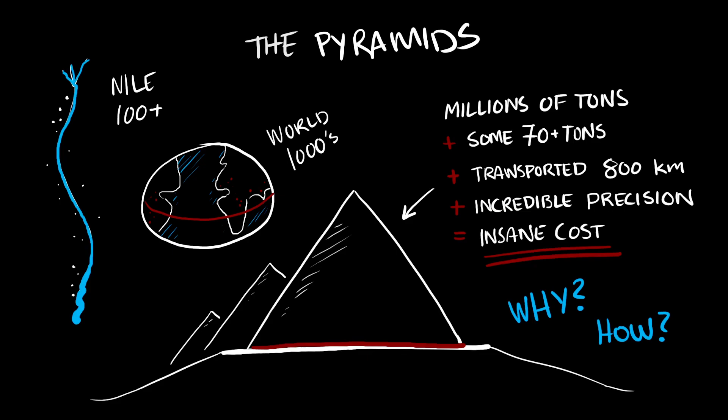Let's first go through some of the existing theories, starting with the official one. The official one goes something like this: all the pyramids were almost exclusively ritualistic, religious, or symbolic in nature. They were tombs or ceremonial sites.

While this has lots of proof going for it, there's also nothing to say they weren't something else and then repurposed in that capacity later. Also, I kind of feel the official story is a little too easy. You can come up with your own theories and make up stories on how it would have some kind of symbolic purpose. Also, a lot of what they claim is kind of unfalsifiable unless you find a better purpose for it.

Then you have the alternative theories, which I think are well-intentioned and potentially more useful. The official story might be convenient, but when you invent a symbolic purpose for things, you might miss out on the practical purpose, which can further inform us about technology in the olden days. But a lot of the alternative theories present too much certainty in my mind. None of them are completely convincing, and a lot are way too certain about their own conclusions, which makes me uncomfortable. But they also often contain useful information, like novel deductions and observations that nobody else has. They tell a story where elements of it might be true.

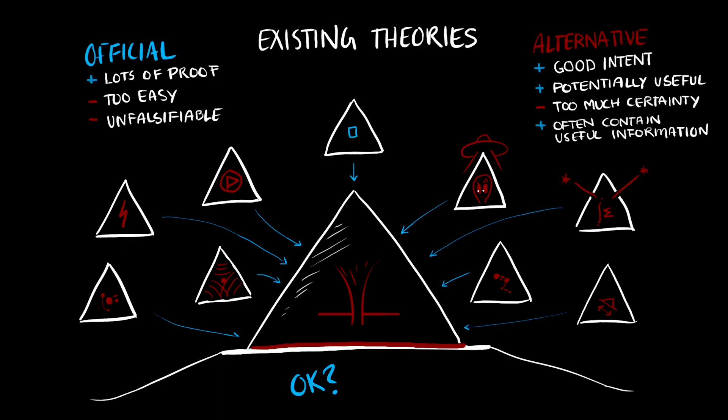And even my own hypothesis, which I'm going to present to you now, also might not be the truth. I'm definitely not claiming that it is. It's a fun hypothesis based on 4 weeks of watching a lot of entertaining videos and reading some papers. But mine too might contain some elements that have some truth to them. Who knows? Regardless, it's a lot of fun. So, all right, let's get on with it.

I think we should start with motivation. Let's start at the very bottom and build up an argument here. I think in general there are 3 categories of motivation that could justify building the pyramids.

The first one is religion, and of course that's the current paradigm—all evidence is interpreted from this perspective right now. Because it's so popular, and also because it's kind of boring, especially for me as an engineer, I say we just skip this one. I don't want to argue against it, but it's definitely a possibility.

The last one is, of course, infrastructure, which is also the most popular category for alternative theories. What kind of infrastructure? Well, we do have electricity, but then again, to power exactly what? We don't have any evidence of electrical appliances or any use of electricity back then. So not only would you have to convincingly argue that the pyramids were power plants, but also that there was something to use the electricity for, and I don't see it.

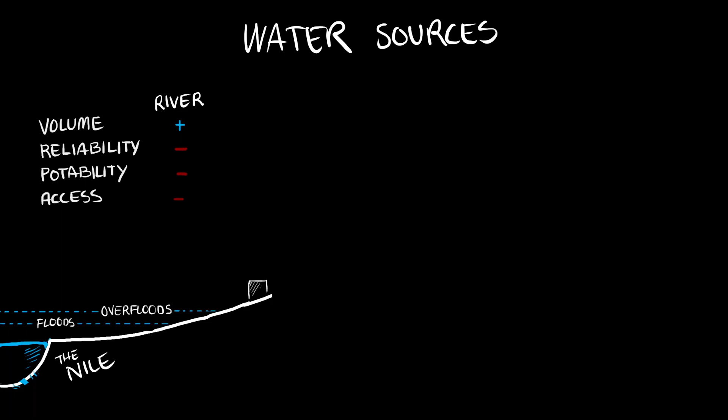The last one is access—was it easy to get to and get a hold of the water? In some ways it was, in other ways it wasn't. I've highlighted some houses here, and you had to haul the water inland from the Nile if you wanted access to it, because the housing needed to be sufficiently uphill or away from both the flood zone and the overflood zone.

They had services back then in ancient Egypt to provide the citizens with water so they could survive. They had people dedicated, whose profession was to haul water inland. But again, it's a lot of work. And if you can get some other system to get the water that you need, and maybe cleaner and better water as well, that would be good.

So the next one I want to talk about are wells. A well is just a vertical shaft like this going into the ground, and it goes deep enough so that it touches the groundwater. Groundwater is naturally potable. It's usually filtered through the rock, through the bedrock, and then you can drink it straight from the well. It doesn't provide as much volume though, because you have to lift up all the water using buckets, but at least you would have access to it, usually where you were.

Now the height that you needed to lift the water could vary, and it also wasn't perfectly reliable. Sometimes even wells would dry up, especially if they were overused. But there are certain things you can do to mitigate this, which we'll look into after this slide.

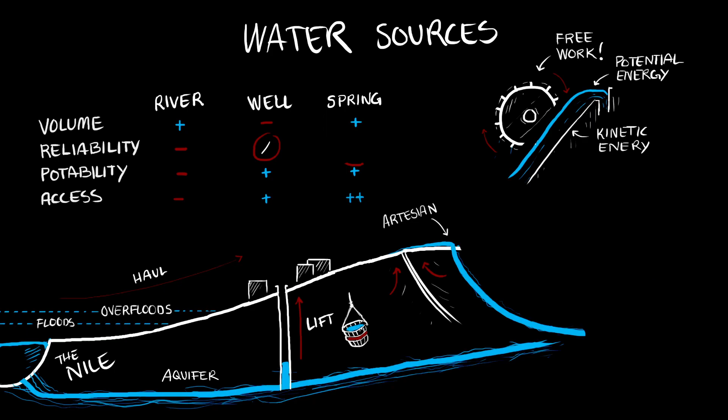In fact, if we think about water coming out further up and then running downhill like this, we convert potential energy into kinetic energy. And if we put on a water wheel or some other device to extract energy from it, we have a lot of free work. So not only does the water come to you, but you can make it do work for you.

In fact, if the aquifer is fed by a lake much higher up, sort of like this, it's so useful that I would actually say it's worth digging tunnels like this and creating artificial springs. That's how useful they would have been. But even springs have problems, which we'll also look into further along in this video. But overall, springs, I think, are just the best thing ever.

Next, let's see how we can improve these. Well design: the basic design of a well is a vertical shaft that looks like this. You need to haul the water up, and the water level inside the well can oscillate up and down, and sometimes it's so low that they dry up, and you can overuse the well. So it's a lot of work and it can dry up. It has its limitations.

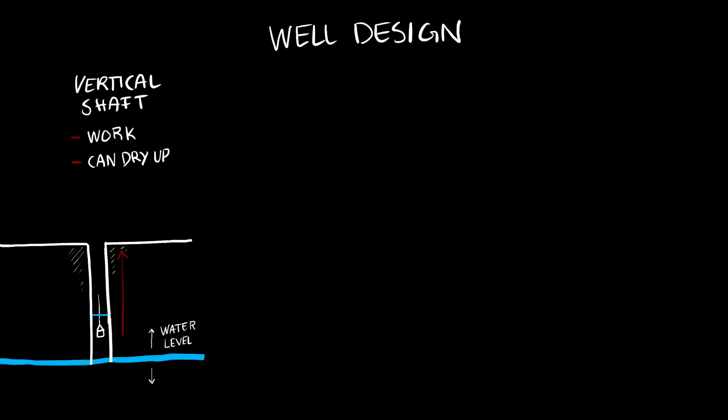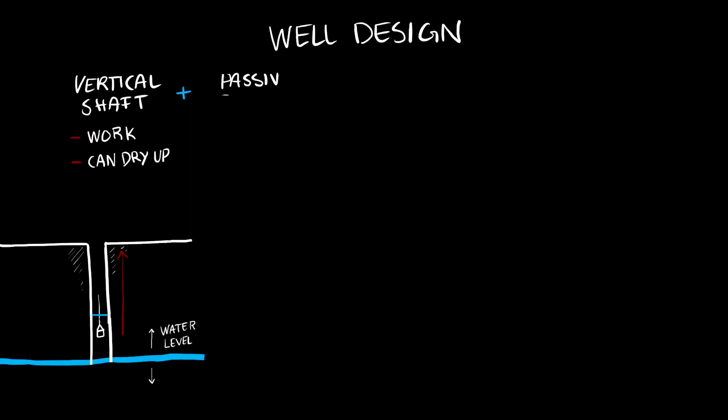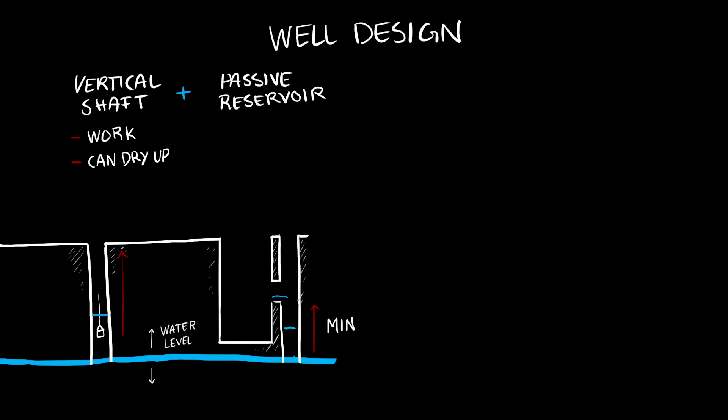So let's look at what we can do to improve the design of a well. I think the first instinctual thing is to include some sort of passive reservoir to it. So let me draw this out for you. You have a normal well here, and then you also dig an additional basin next to it. When the water level in the ground rises above a certain minimum limit, the water spills over the edge and then fills up this basin.

This, on average, means that you have more stability. You have an additional reservoir of water you can extract from, even if the well dries up temporarily. And on average, it's going to be less work for you, because while the well level goes down, you're still going to have a higher level in your reservoir. So on average, it's going to be less work for you.

But you do have this minimum that you need to reach before you start filling it up. And also, you have the opposite problem: there's a maximum here too. If you fill it beyond the minimum, when the water pressure and the groundwater level goes down again, it's going to flow out, and then you're only going to be able to maintain that minimum amount. So you have both a minimum and a maximum.

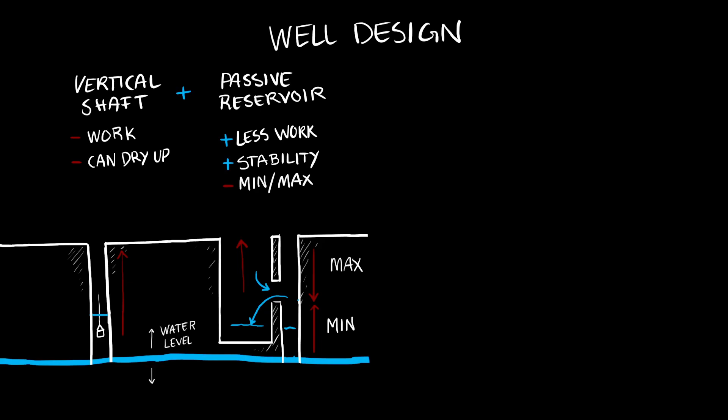So then the natural next step is, well, can we fix this? Do we have a better design? Yes. And the only thing we need to do is include a check valve. Let me draw this out for you. A check valve is essentially a one-way valve. Water can only flow in one direction, and in this case it can flow into the reservoir, but not out of it. The way I've designed it here, which is the most likely design I think the ancient Egyptians would have used, is just a rock that would be lifted up by the water pressure, and then lay down again inside a groove and close itself up when water wanted to flow out of the reservoir again.

Now this means that it's even less work. The average water level is going to be higher on average. You don't have any min and max anymore, and that contributes. Also, it refills constantly, so that's a benefit as well.

Now, can we further enhance this design somewhat? Yes, I think it makes sense, and we know historically that they did so, that you add a diagonal passage, like so. This allows you to construct the reservoir easier by having rocks pushed up or pulled up the diagonal passage instead of hauling them up vertically, which can be risky. It also allows easier construction and easier extraction of the water itself. You can have carts, or you can just walk down to the water surface and use buckets there instead of having to use a rope to haul it up. So in general, I think this is just a more practical solution. It might not look exactly like the way that I have drawn it, but something like this.

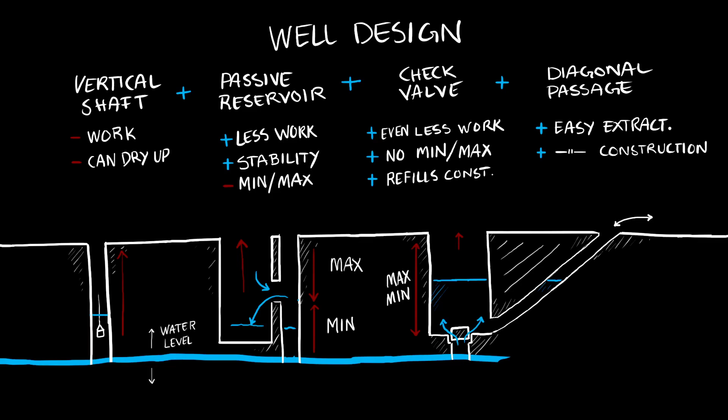All of these things that I've designed so far, we do see all over the world, and they have some common negatives. The first is that they risk contamination. They're open to the elements, which means dirt is going to get in, and not only is the check valve going to get clogged up, but you get dirty water, and you don't want that. You also risk overflooding. What if the water pressure inside the well exceeds the ground level and water starts spilling out of the well uncontrollably? Sort of like this. Since infrastructure and a lot of housing is made out of mud brick, you can easily see how this could create massive problems. You could have destruction, and yeah, it would be deeply unwanted to allow this to happen.

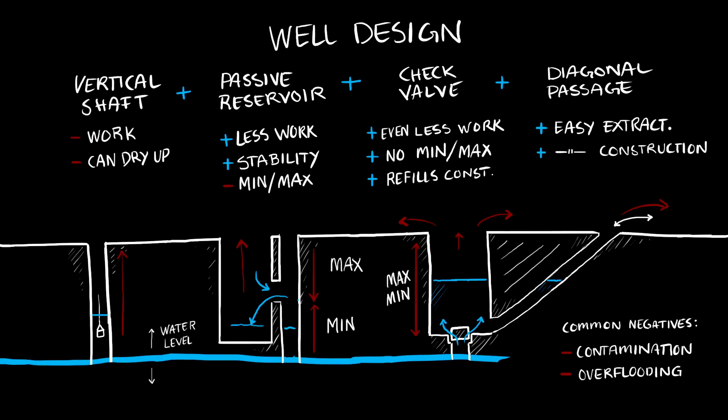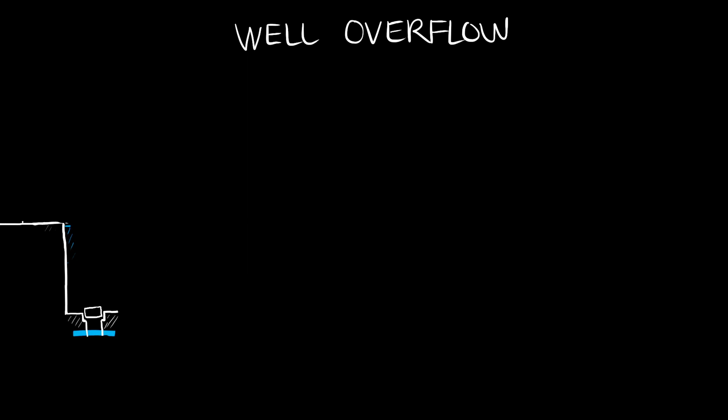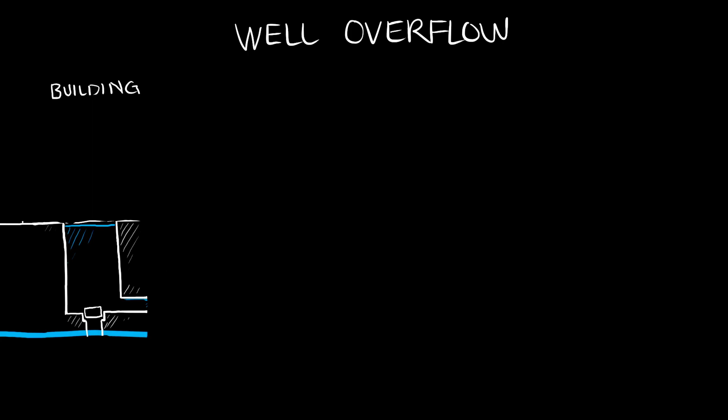So how can we prevent that? Let's look at well overflow. First thing I would do to my well, let me redraw it here for you, sort of like this. It's now filled all the way up and it wants to go even further. I would put a building on top of it, with some heft to it, some weight. Now the water needs to push the building away in order to escape, and of course that's going to be difficult. This would cover it so it wouldn't get contaminated, and it would plug it.

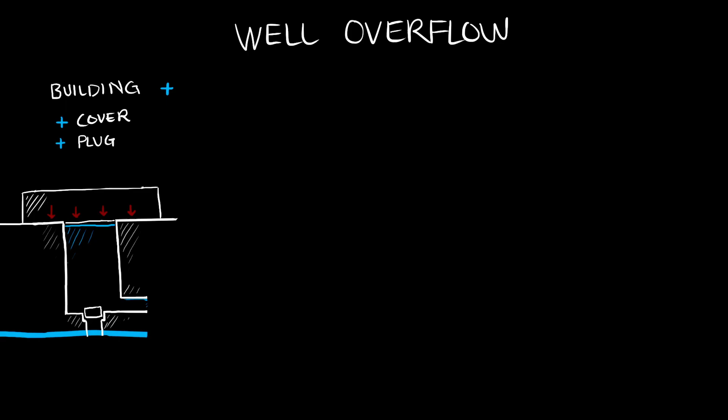But what about the vertical passage? We could make an even bigger building to cover both the vertical passage and the reservoir, but I think it makes sense to make a portcullis like this. Instead of having to expand the building massively, we can simply have a sliding door that we could close, and now we don't allow water to escape. That is kind of safer, at least. It's not completely safe, but at least safer. And we do get some control over the water source. We can open up the portcullis a little bit, although how feasible that would be when the water pressure is quite high, I don't know. I think it would be very difficult. So in general, with this solution that I've just drawn here, you kind of lose access to the well. So how can we maintain access to the water?

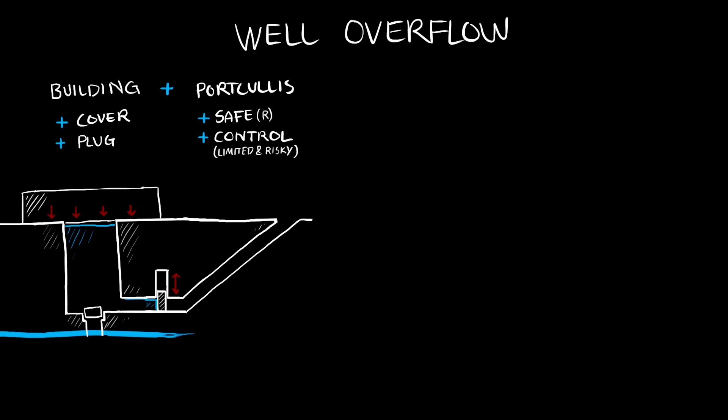And so the next thing that I think makes sense to try is to have some sort of chimney. Let me draw this. It would kind of look like this. Now you have a relatively small chimney that you need to force up into a certain height above ground, which means that the exit pressure of the water coming out of the chimney is going to be lower than if you took the same amount of water in the same cross-section further lower towards the ground.

This would allow you to retain the water supply, although in a limited capacity. You can't extract as much water as you previously could, but at least it won't spill completely uncontrollably. You could also look into integrating some sort of flow limiter inside the chimney, maybe something looking like this, having a reasonable amount of flow at any given time.

All right, next step would be a stepped construction, I think. I'm starting to get into more and more speculative territory as this video goes along, so I hope people are aware of this. So yeah, let's just proceed. This, I think, will be a more flexible solution, although a risky one. Let me draw this one out for you. It will kind of look like this.

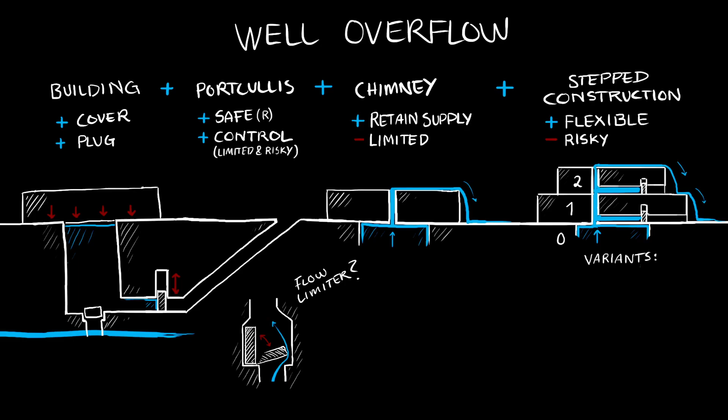You can have multiple levels and multiple portcullises, allowing you to open up the one that's most appropriate to the pressure and the flow rate that you want out of your well or spring. In general, I think there would be two variants. The one that I've sketched for you here, where you have 3 levels, I would call the single column type using portcullises.

Conceptually speaking, this is how it looks. You have many portcullises at many levels, and then you make the water travel further up before it spills over. And this spillover effect means that you get less flow rate. So the higher up the water column is, the higher up you want to open up the portcullis to get the same amount of flow rate, because you probably have a predictable amount of usage of the water, and you want a predictable amount of water as well.

The other one uses multiple columns instead, kind of like this. But here, I don't think it makes sense to use portcullises. Instead, I think you need to use some other sort of valve or mechanism, and I call these overflow valves. Let me sketch these out for you. I would design them something like this, the most basic design ever. It's simply a large block of stone in a small chamber, kind of like the antechambers that you see.

Now, how does this work? Well, it works by the stone at a certain flow rate will probably move and block the exit, the outlet of the overflow valve, at a certain flow rate. And then if we put these overflow valves at many levels up, you can see that first it would want to have water flowing through the -1 overflow valve. And then when the water flow becomes too much because of the increased amount of pressure, it blocks itself off, and now water has to flow through the 0 column. And then that blocks itself off, and then it goes to number 1, and then number 2.

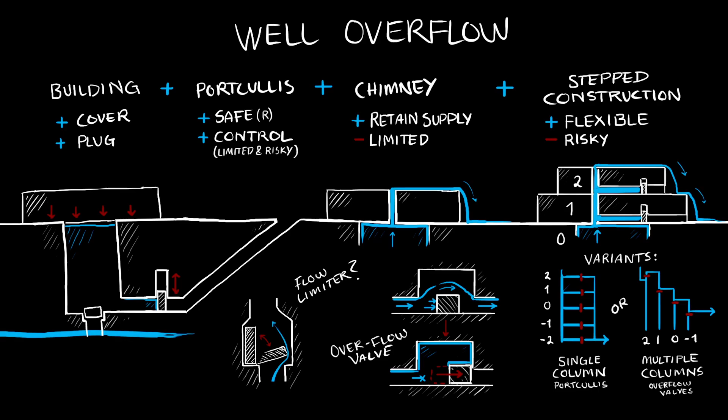All right, so the next step then is to talk about, what if we have an overflowing spring? What do we actually do when water is just gushing out of the ground completely uncontrollably? Now we can't just start building a very neat and orderly structure straight on top of the spring, the rocks and the stones will simply not stay in place. They will be pushed away by the huge amounts of water that's spilling out. And of course, this overflowing spring that might suddenly appear will also cause potentially a lot of destruction.

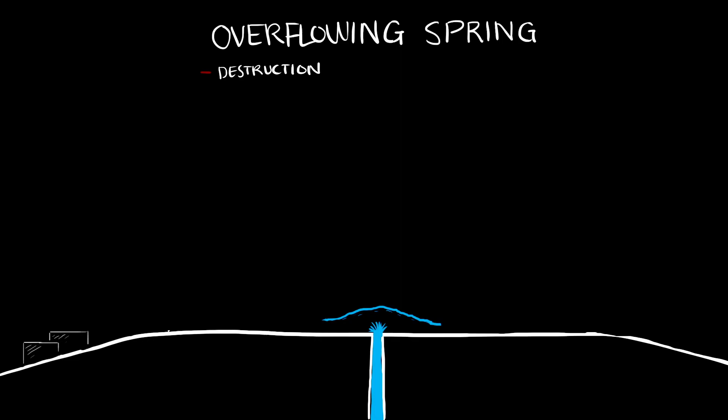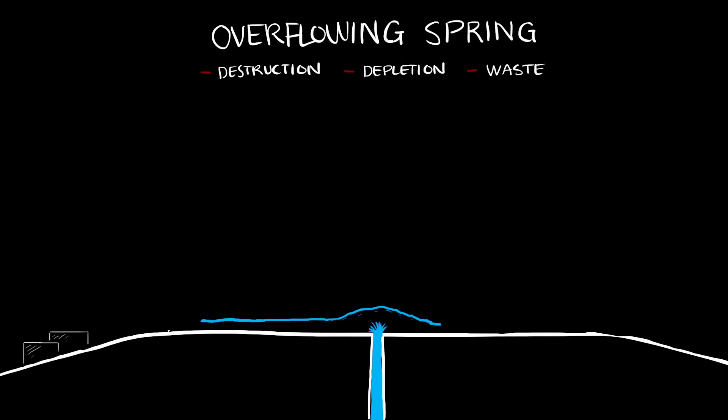If you have a lot of houses close by, something like this, this is kind of like on top of a hill. Then water can flow over there and destroy the houses and also destroy a lot of infrastructure. It can also deplete the water source, like the lake that I drew earlier. And essentially what you're doing is wasting a lot of very valuable, potable, useful water. So how do we fix this? How do we actually handle this situation?

The first damage mitigation thing that we do is build some retaining walls like this. They need to be quite a distance away from where the water is coming up, because you want the water to settle down and be even towards the walls so it doesn't spill over.

Also you want enough room to build a large structure over the spring somehow. The next step is to construct a large channel to guide the water safely away, and it would look something like this, with the water flowing down like that.

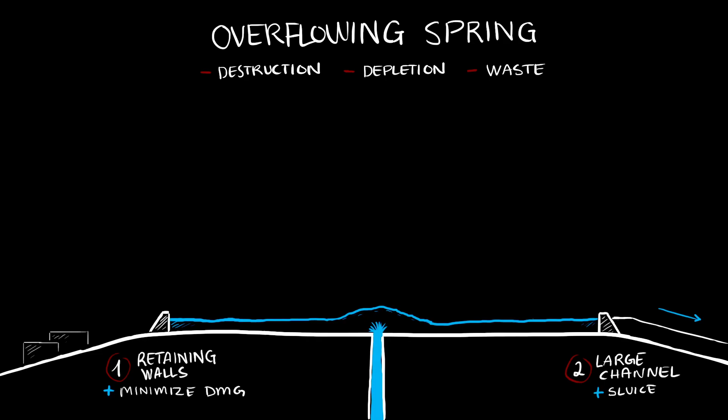What I would also look into doing is integrating some sort of sluice system, as well as a large channel, to exploit the potential energy in the water and haul building materials up to the site using free work.

So now these buildings are safe, and we can start actually closing off, or at least limiting or controlling, the spring itself. I would also level the ground. So how do we stop the flow? How do we actually close off the spring itself? This is where the title of the video comes in.

I think it makes sense to build a big pile of rocks. We start stacking rocks on top, around the spring first, and then one of the last steps is that we toss rocks in the middle. Eventually all the weight of the big pile of rocks will put enough pressure on the spring to stop the flow. We do lose access, but at least we're not wasting all this precious water anymore — we're not depleting the source.

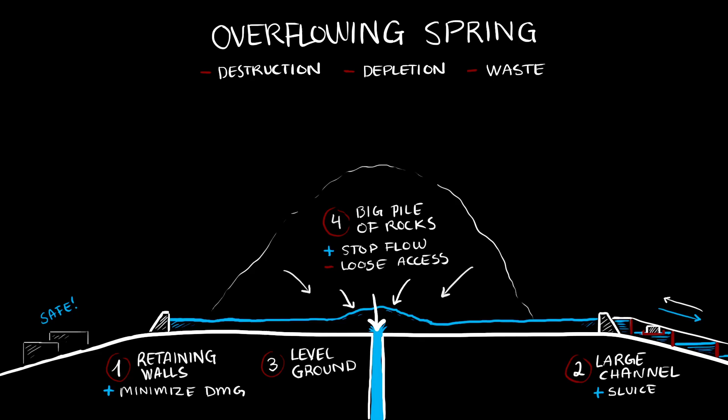But isn't there a better way than to just randomly stack a huge pile of stones? Can't we do it in a more systemic and better way in general? I think we can. But how exactly do we do this?

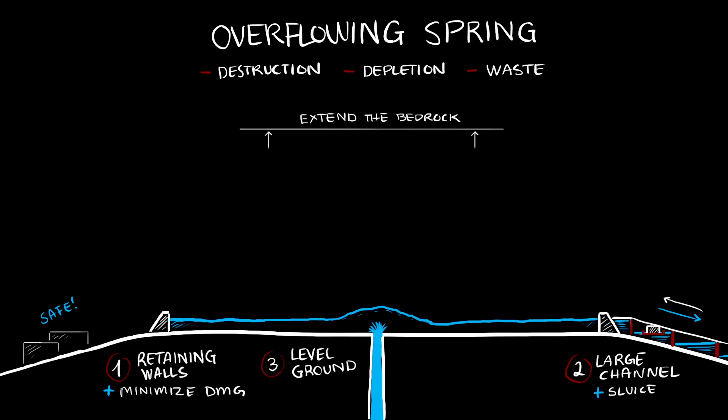I think I would want to use many of the same solutions we already talked about when it comes to wells. If I can somehow extend the bedrock upwards, I can use those solutions. This would necessitate building a column of water like this, and the column of water would need to be a certain height, and also a certain cross-section if we want enough to flow through it.

Let's start with the height. What kind of pressures do we need to counteract? Well, if we want to completely halt the spring from flowing, we need a water column that produces a hydrostatic pressure equal to what the pressure is down at the base, at the very exit of the spring. Not an unrealistic pressure to face is something along the lines of 10 bars.

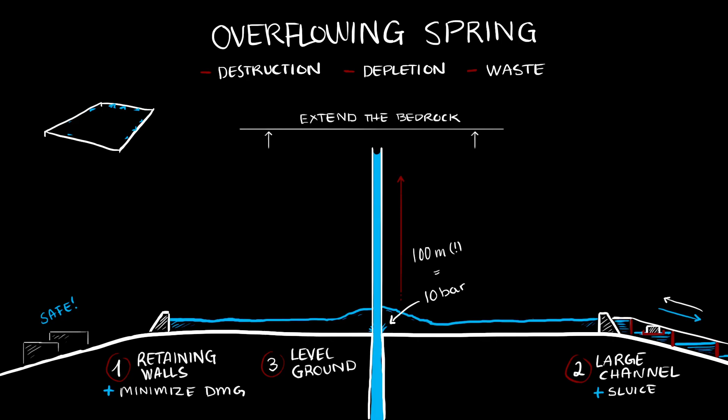For those with some familiarity, that means we need a water column that is 100 meters high. Holy shit, right? That's a huge water column. For the Americans out there, that's 330 feet. That's very, very tall.

And of course, because we want a certain size for the water column — this is the cross section — let's say it's 1 by 1 meter. Maybe it doesn't need to be this big, but let's just say that it is. Well, we have a problem here.

The problem is that water exerts pressure. Water, especially at 10 bars down at the base of the water column, is going to exert a huge amount of pressure, and also a huge amount of lateral force outwards. Drawing this on the water column itself, we can see that the pressure, and thus the force the water column exerts laterally, is diminishing like this. It's largest at the base, and then it gradually weakens towards the top.

How do we handle these forces? This is a huge problem. We don't have steel pipes. Instead, more or less the only solution that we have available to us is something like this.

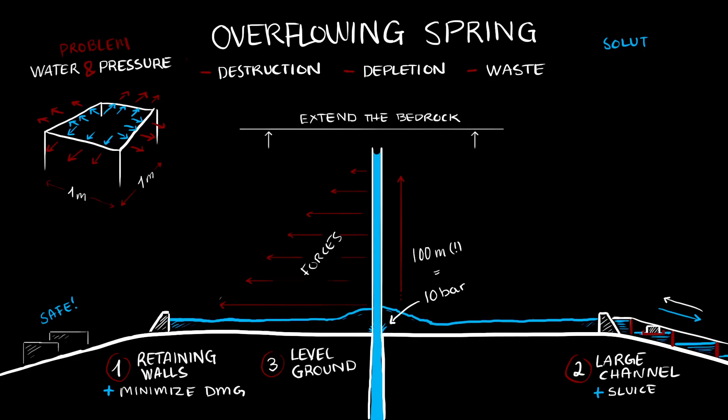We need to use weight and friction. If we have a stone like this, it has a certain amount of weight to it. That weight bears down on the ground, which when the water pressure pushes on it, attempting to move it using a force, friction withstands moving of that block. Of course, we need to have a lot of blocks, both stacked next to themselves and also on top of them, kind of like this, in order to counteract those immense forces that we're talking about. And the amount of rock and the amount of friction and thus the amount of weight is going to be roughly proportional to these arrows.

And so if we draw this out, and you might have suspected what I'm on about, you get a pyramid. And that's kind of neat, I think. The optimal design to counteract those forces is actually a pyramid shape. Or, well, in actuality, it's a cone shape. But taking into account the fact that it's much easier to construct something that's square instead of circular, then a pyramid is the one that makes the most sense.

So now we have a water column. That means that we can build it gradually upwards, and it's safe, and we always retain access to the water source as we build it up. And we've built a big pile of stones, big pile of rocks in a pyramid shape. And the pyramid shape is stable. It's going to be strong against those lateral forces that the water column is going to produce.

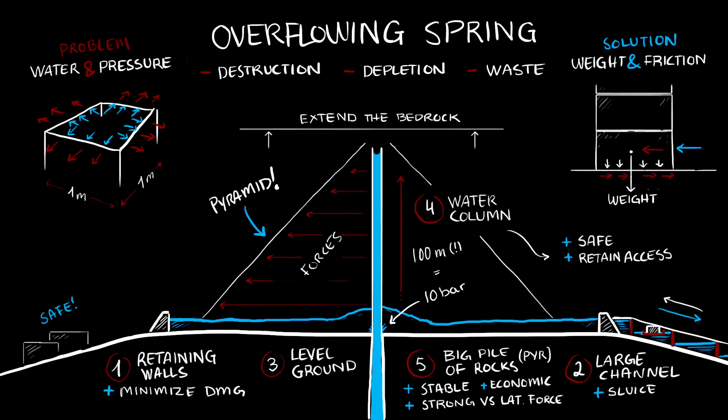Now, I want to mention that I wouldn't necessarily want the walls to be 45 degrees because the bottom layer of the pyramid is also going to have the weight of all the other rocks stacked on top of it to further increase the friction and stuff. So I don't need it to be 45 degrees. It can be a lot steeper than that. And I think the Great Pyramid is something along the lines of 51 degrees from horizontal, but it can be a lot steeper than that. I think looking at the pyramids all over the world, a lot of the pyramids are a lot steeper, and it truly makes sense. It's still going to be strong enough to withstand the forces that we're talking about.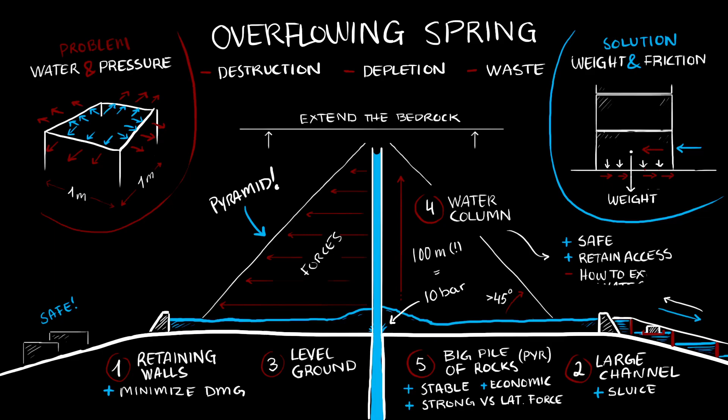But we have the next problem, and that is going to be, how do we extract the water from the water column? So that is going to be the next thing. Safe extraction of water. So let's first look at the height.

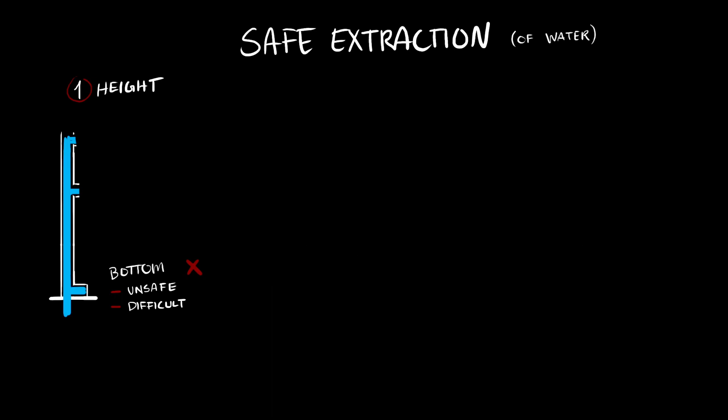What height on the water column do we extract the water at? And if we do so at the bottom, it's going to be completely unsafe at those 10 bars of pressure. And it's also going to be exceedingly difficult to make some sort of valve that can operate at those pressures. So that's completely out the window. Looking at the top, well, we have no flow rate there. That's just out of the question.

The logical compromise, or the best position, just flat out, is of course a bit down from the top. We kind of estimate where we want it, where we can construct it compared to how can we engineer something that's going to function decently. A bit down is going to give us a decent flow rate. And also, if we find the correct position of it, we're going to ensure that even if the pressure drops a little bit, we're still going to have a decent amount of flow rate if we can control it somehow. So that makes the most sense.

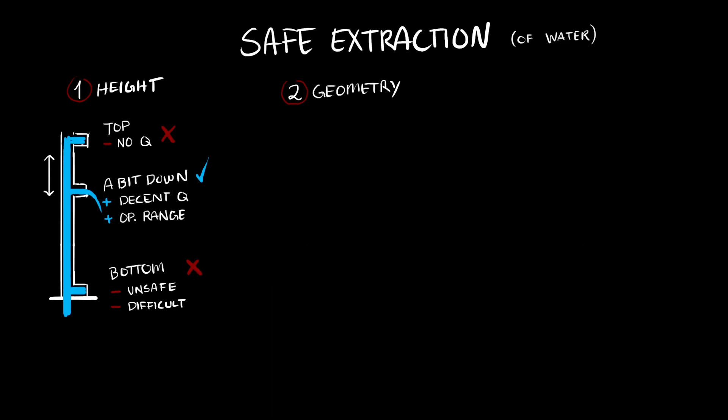The next one is geometry. And just extracting the water straight out from the water column like this at a 90-degree angle using a sharp corner, that's a bad idea for several reasons. The first of which, you're going to get turbulent flow. It's going to cause a lot of restriction and problems with the flow.

So to describe the difference between laminar, which is the good thing, and turbulent, where the water molecules are kind of like chaotically swirling about. You have a lot of movement not in the direction that you want. The other is laminar.

All the water molecules are traveling in the same direction, more or less—not necessarily at the same speeds, but still it's the most efficient way of transporting water. There's less restriction, it's more predictable. So turbulent is bad, laminar is good. How do we fix this in our water column?

There are multiple solutions, but I think maybe the simplest and best is to construct a reservoir like this. That allows the water to exit through an inlet, slow down inside the reservoir, and then accelerate gradually out the outlet again, facilitating more laminar flow. You also have more control because the water level inside isn't going to oscillate huge amounts, since you need more water to go up and down inside the reservoir compared to just the water column.

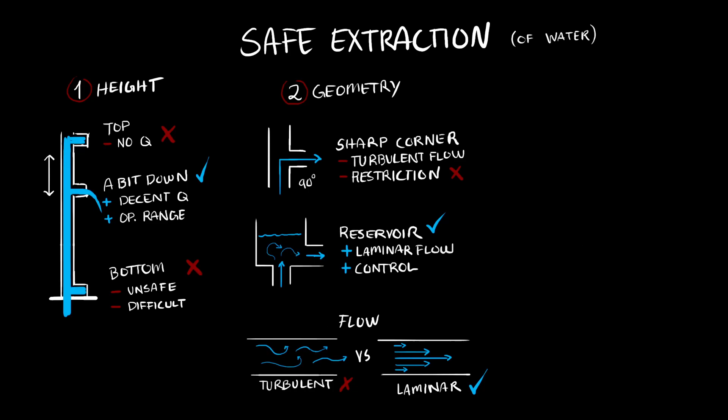The last thing I want to mention on this slide is the design of the valve itself. It can be a good solution to have a single portcullis, something like this. It's a very simple design, but it's going to be very heavy. Also, if all the water pressure is pushing on the block of stone—well, we relied on friction earlier, but now friction is working against us. We get a lot of friction in the system. It's not a good idea, I think.

A better idea, perhaps, is to use a multi-system, and I think this is kind of ingenious. You allow the second and third portcullis, and the space between them, to get filled up with water. Now you have small water columns in between them. That means that instead of having a large differential pressure between one side of the portcullis and the other—which pushes it against the rock and causes a lot of friction—you now have a more even distribution of pressure, a small delta, which causes just a little bit of friction.

That means that by backfilling the portcullis system, you'll have an easier time moving each individual portcullis. And of course you also have a safer system, because you have several portcullises and all of them need to fail in order for your entire portcullis system to fail. So I think this is a better idea.

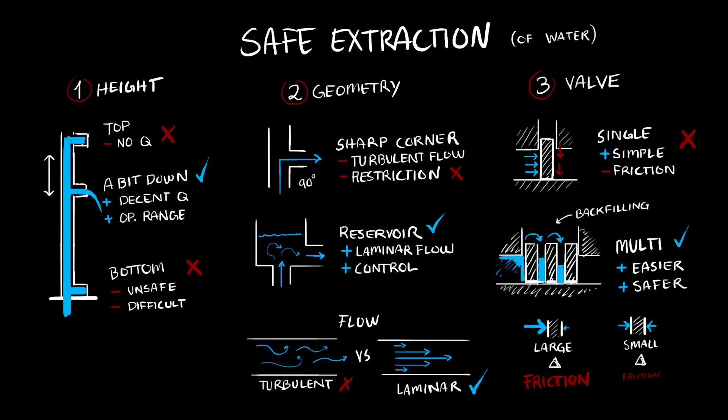But there's another thing we need to talk about that's a huge problem in this entire system—the phenomena we call water hammer. So what is water hammer? Imagine you have a pipe of water with a large amount of water flowing through it. That water is going to have a lot of kinetic energy.

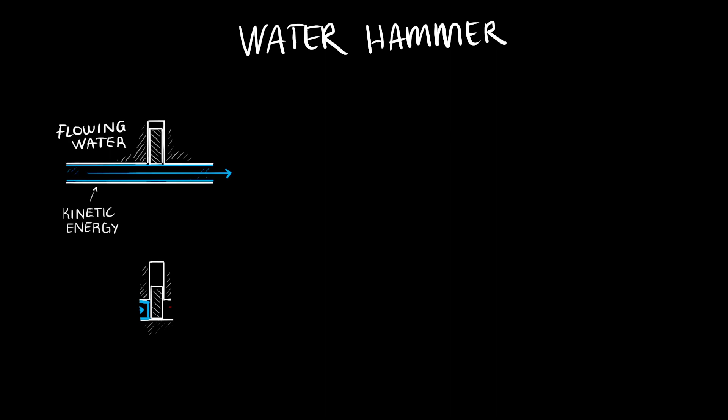Now, if you suddenly slam the portcullis down, boom, like that, all that kinetic energy from the flowing water needs to go somewhere. It needs to be withheld by the stone and the structure itself. And so what you get is a huge pressure spike like this—pressures that can rise many times over what you'd normally expect if you don't account for this phenomena.

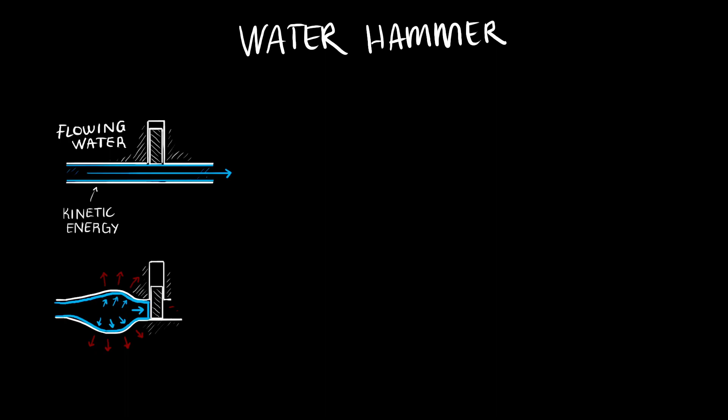Either you need to oversize, or you get damage. These are the potential consequences of water hammer if you don't find a smarter way of fixing it, which we'll look into next. Something's going to fail, and the pressure is going to find the weak point in your system, and the weak point is going to fail. In these systems we've been talking about, I think the portcullis is usually the weak point, and it's just going to go to shit—it's going to fail somehow and be blown completely to smithereens.

What can we do? Well, here are some of the solutions—not all of them, but some that I've been able to come up with. A lot of these solutions are also being used in industry all over the place. So the first one is that we can make an overflow system, kind of like the chimneys we've been looking at, right?

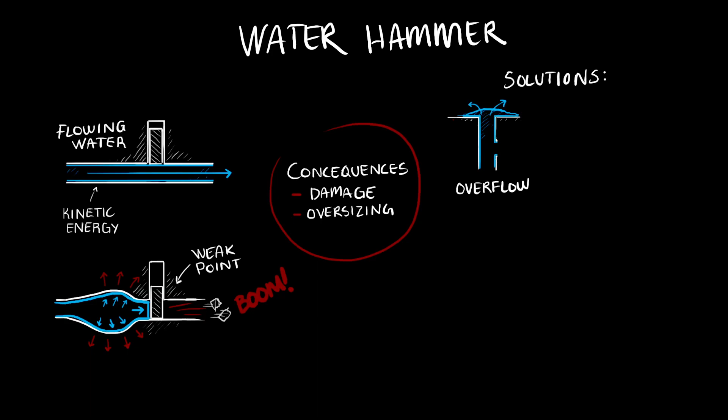If you have the portcullis and it slams shut, the water continues past the portcullis and pushes further up the water column. But this means you need a taller water column, which would be wasteful in terms of water. Instead of stopping the water, you allow it to spill, but you still need a higher column of water. It's going to be costly. This is not the way you want to do it in general.

You might incorporate some version of this, but it's not the primary thing you want to use. So next, you can insert a buffer, and we use this all the time. What I've designed here is a type of air buffer.

When the water is shut off, the water pressure and energy, instead of increasing the pressure in the water itself, compresses a huge amount of air. That acts like a suspension, like a car suspension, and evens out the pressure, so it doesn't reach the same peaks and destructiveness as other systems.

This, though, requires an airtight chamber. And it's pretty critical where you place it - you can't just place it anywhere. You need to place it very close by your portcullis or where you're going to shut off the water, because you want it to absorb as much of the energy as possible.

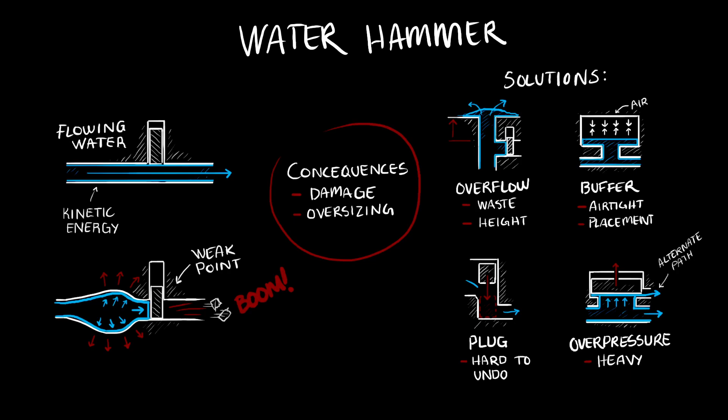It would look maybe something like this. This too would need to be placed like a buffer, close by where the pressure peak is expected. Here you get water needing to lift up a huge amount of weight as soon as it reaches a certain pressure, and it manages to lift this very heavy stone. You have an alternate path for the water to flow to avoid some of the extreme pressure peaks that can be destructive.

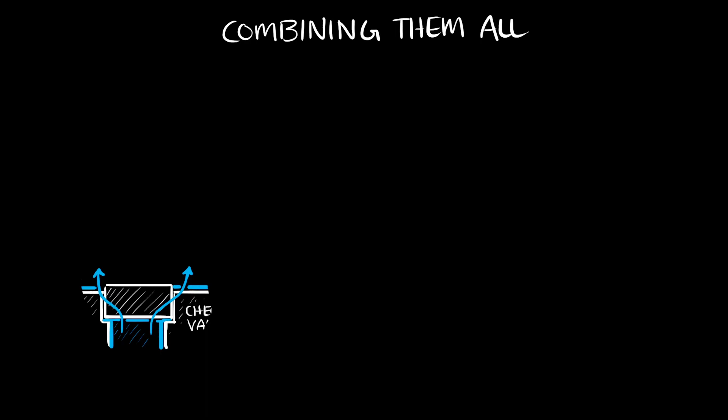So now I get to perhaps one of the most fun parts. When we have all of these solutions, let's combine them all and see what we get. The first thing we do is have our check valve. Water is flowing in like this into our reservoir.

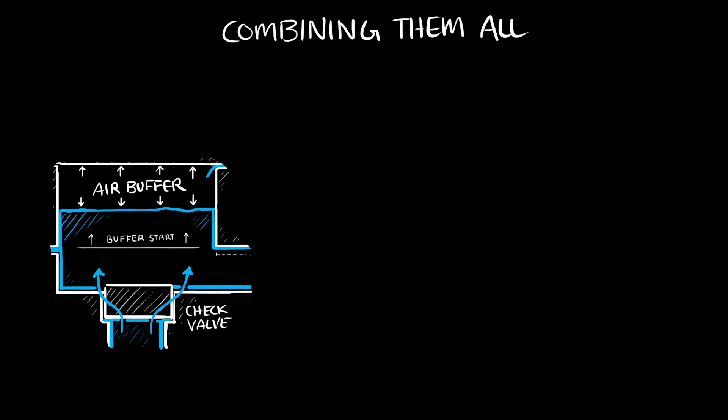And now we add an air buffer inside the reservoir. But we need to be able to set where the air buffer starts. If we don't have any air outlets, like I talked about earlier, the entire system can act as a siphon and you can get a runaway water source. What you want is a predictable place where you introduce and allow the air to escape - that's essentially where the air shafts come in.

Let me draw in the air shafts, something like this. As you can see, as water starts filling up the water column and then the reservoir, when it hits and supersedes the air shaft positioning, air cannot escape anymore. You're filling up the air shafts too with water, but you're also compressing the air inside the air buffer.

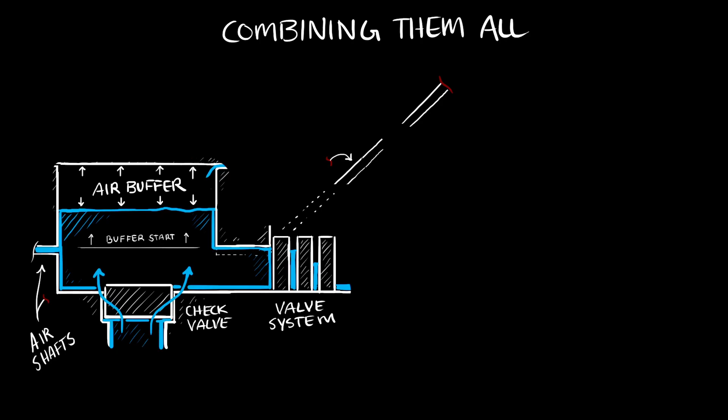This allows you to have that suspension element before you get to the valve system that's going to be here. This is a perfect position for it because it's right before the valve system. And as you can see, the water is flowing straight towards the air buffer instead of pointing towards the valve system - we have a 90-degree turn here. That's good, and so the air shafts are perfectly positioned in height to start that air buffer right above it.

Where are we going to put the overpressure valve? That, of course, is going to be right above, kind of like this. And let me just finish the roof. There we go.

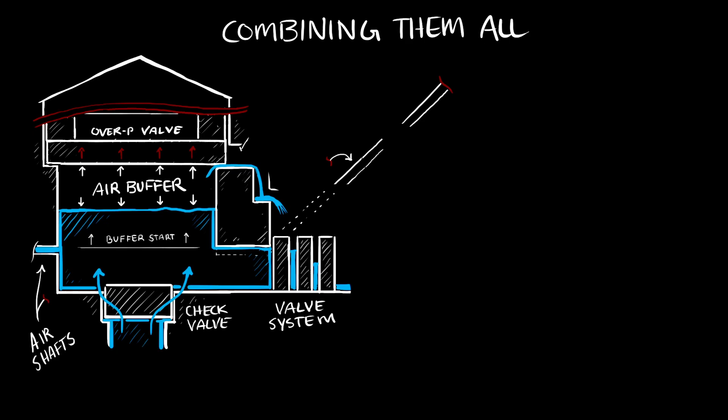Now we have a huge amount of weight that, if given enough pressure and if the air buffer isn't enough anymore, the entire roof of the chamber is going to be lifted up and water is allowed to escape, kind of like this - an overflow path. As you can see, the overflow will also fill up the valve system, the backfilling system, which will allow the portcullises to be easier to raise, which is a very neat system design, I think.

One cool detail that I saw in one of the papers that I read, or one of the websites that speculate about the pyramids, is the fact that if you fill up the air shafts completely with water, that is more or less the amount of pressure that will also be needed to lift the roof of all the relieving chambers up and thus allow that overflow path to open up. That's kind of a neat detail. It's an insane amount of pressure and an insane amount of weight, but they kind of roughly match up.

So although that's not definitive proof that this was the function of the relieving chambers and the entire structure, I think it's a really neat observation. Not mine, but a neat observation.

Of course, you can also measure the amount of pressure inside the King's Chamber by measuring the water level inside the air shafts, and also the angle, as I indicated to the right here, that the water is jetting out of the air shafts. But there's one thing that we've not included yet, and that is the emergency plugging system, which, of course, is the plugging stones that we see in the Grand Gallery and the ascending passage. So let's draw those in.

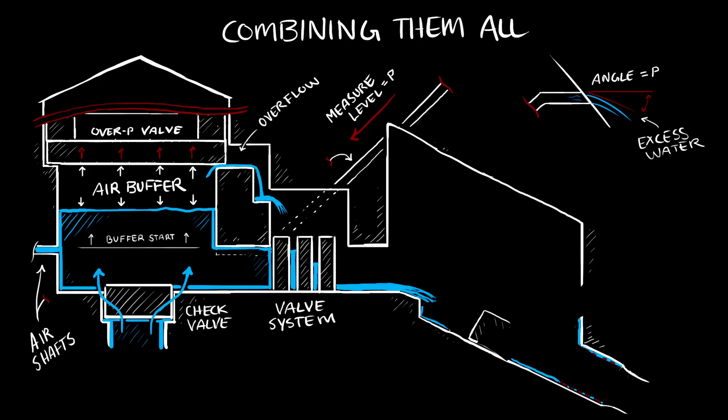It's kind of like this. I've shortened the Grand Gallery here, so it's like the baby version of it, but I think you'll get the point. So you would have plugging stones kind of like this, ready to slide down and get into position down in the ascending corridor.

How would I design a release system for these plugging stones? Well, I would design them like this. I would have some sort of axis of rotation here, which could allow for the rotation of an arm, sort of like this. At the end, it would have a buoyant element, like this.

And now, when the Grand Gallery fills up with water, the buoyant element is going to cause this entire arm to rotate up into this position. And this kind of small arm that's holding back the rock - it wouldn't be designed exactly like this, but sort of like this.

All right, now that would essentially eliminate the friction from the system and still allow predictable and good release of the plugging stones. And of course, if you have multiple of these further up in the Grand Gallery, the plugging stones would be released in a sequential fashion - the bottom one first as the Grand Gallery is filling up, and then the next one, and the next one.

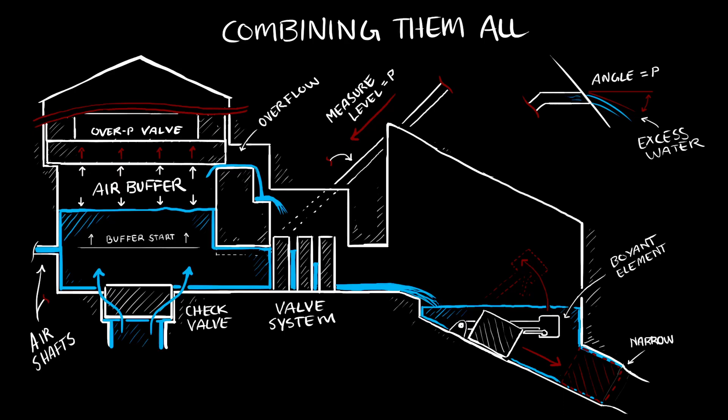And so, as you can see, all of the previous things that I've been talking about kind of make sense when you start looking at the King's Chamber, the portcullis system, the relieving chambers, the positioning of the air shafts, the Grand Gallery - all of it. Really cool, I think. Again, this doesn't say that it's absolutely true, but I think it's a cool thing.

All right, now let's talk about how I would construct the pyramids. I have some thoughts here too. The first thing that strikes me immediately is when we have a spring like this that represents a huge amount of free work, then I think we should use it. And indeed, a lot of things make more sense when you think about it in these terms.

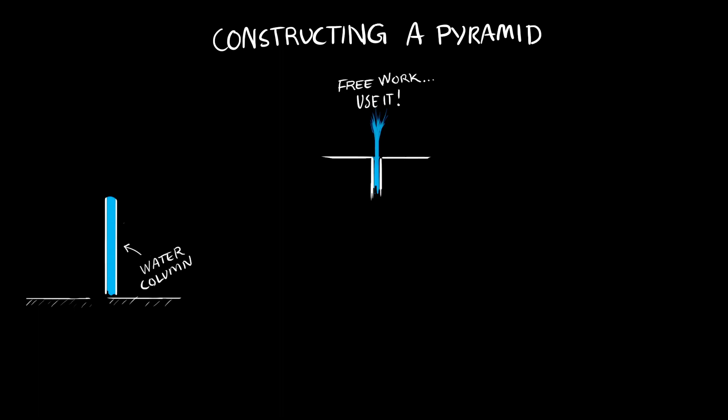So if we have ground level here and we construct our water column straight up like this, we can build a structure that looks like this. And if that water column exits here and then runs into - we can have a counterweight intended to be filled with water at the top of this diagonal ramp. This will allow the counterweight to slide back and forth like this, and it can be quite tall.

And the counterweight slides all the way down, and then it empties. So it fills up here, and then empties when it comes down. And now if we route these ropes further up and we extend the structure, kind of like this, the rope can wrap around some logs here, and then go down and lift stones up.

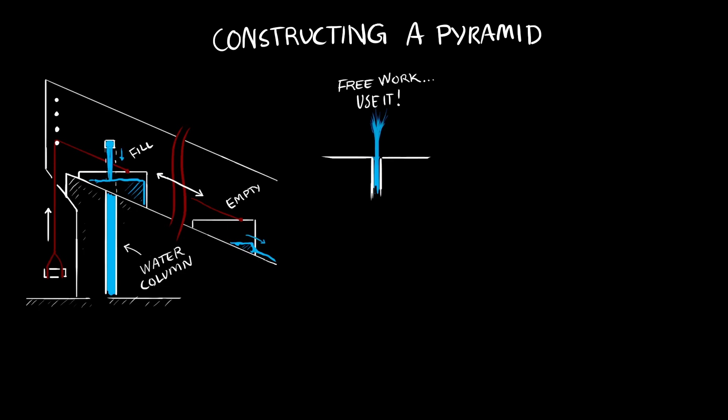This would be highly reusable. You could also have a dedicated counterweight to pull the main counterweight of the counterweight system back up into position to be refilled. Essentially, this would allow you to use the potential energy in the water to haul the stones upwards. This could also be part of a central shaft inside the pyramid, or a simple groove cut into the opposite side, where you enter the stones and lift them up in a central location, because the water column would need to be approximately at the center of the pyramid.

You could potentially also do the opposite. You could use the counterweight to haul stones up, and fill a basket or some container with water, and that would pull the rope straight downwards instead. I think it's more feasible to do it the other way around, but certainly this is also a possibility.

I would also look into trying to use all the potential energy of the water. So the thing I've designed and sketched on the left of the screen would be the most basic level, but I would construct a series of them like this. They don't need to be right on top of each other - they can be offset by a few meters, similar to the offset of the corridors of the Great Pyramid. They could also be offset 90 degrees, 180 degrees, or alternate in a rotational pattern around the pyramid. I don't have illustrations for this, but I hope you get what I mean.